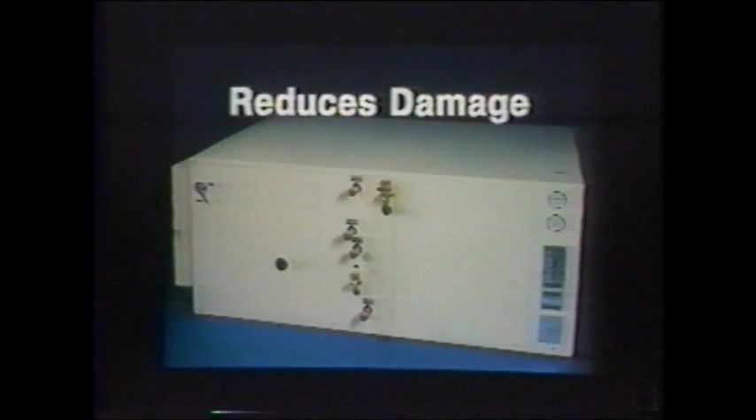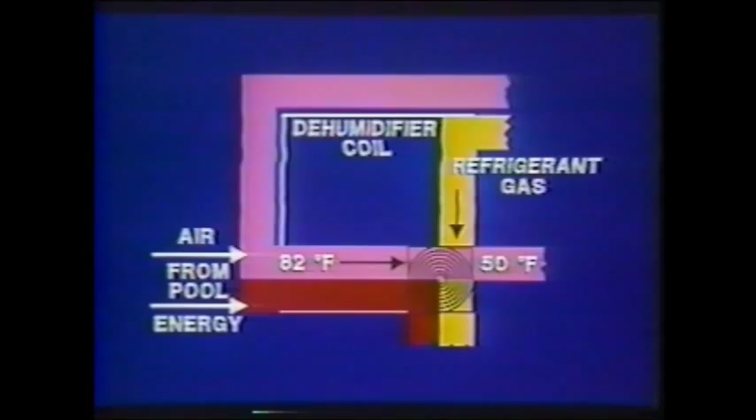Let's look for a moment at how the Dry-O-Tron works. Air from the pool enclosure is drawn through a dehumidifier coil, where it is cooled by a refrigerant gas to about 50 degrees Fahrenheit. When the air is cooled below its dew point, both water and heat are released. The heat energy is transferred to the refrigerant gas. Approximately 13.8 BTUs per pound of air is transferred. This breaks out to 8.5 BTUs of latent heat and 5.3 BTUs of sensible heat.

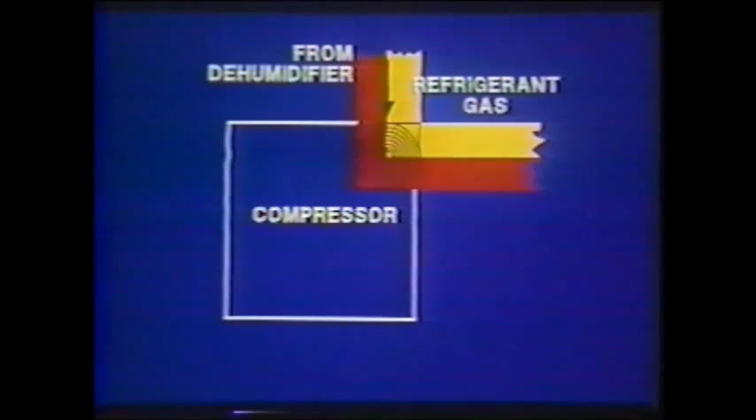As the refrigerant gas passes through a compressor, pressure is increased, and its temperature is raised by the electrical energy used to run the compressor to about 120 degrees. The refrigerant gas next passes through a pool heater where cool pool water, approximately 68 degrees, is drawn in and is heated to about 82 degrees by a portion, 8.5 BTUs, of the heat from the refrigerant gas.

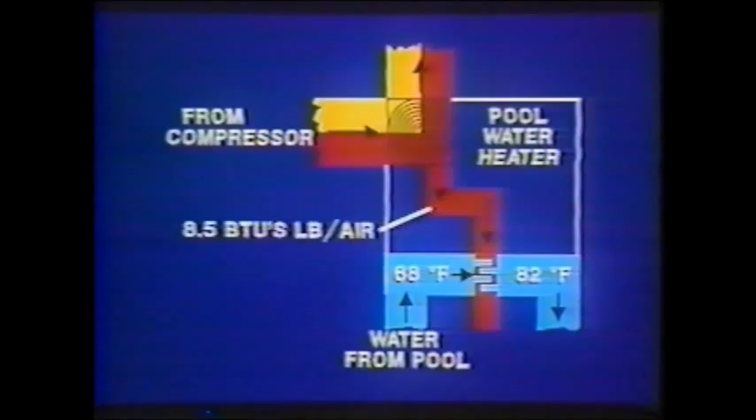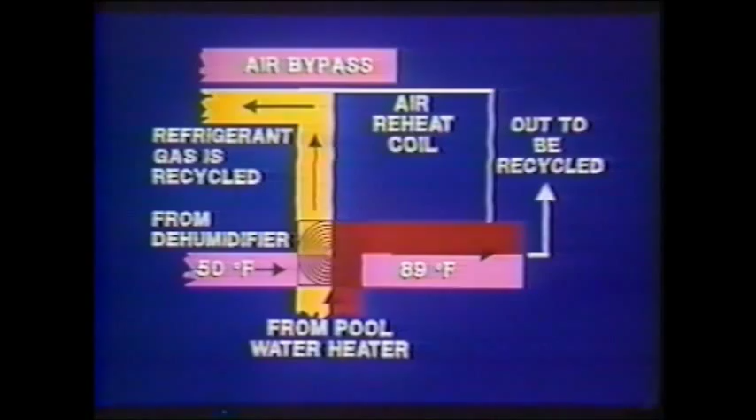The refrigerant gas, in a cooler state, and now partially condensed, moves to an air reheat coil, where it heats the dry cooled air from 50 degrees to approximately 89 degrees, and fully condenses back into a liquid. The dry heated air moves out into the pool enclosure, where it picks up humidity and energy. The humid air is then drawn back into the dehumidifier coil. It again meets the refrigerant that had been cooled in the air reheat coil and is now once again a gas, after passing through an expansion valve. The complete Dry-O-Tron loop system then starts again.

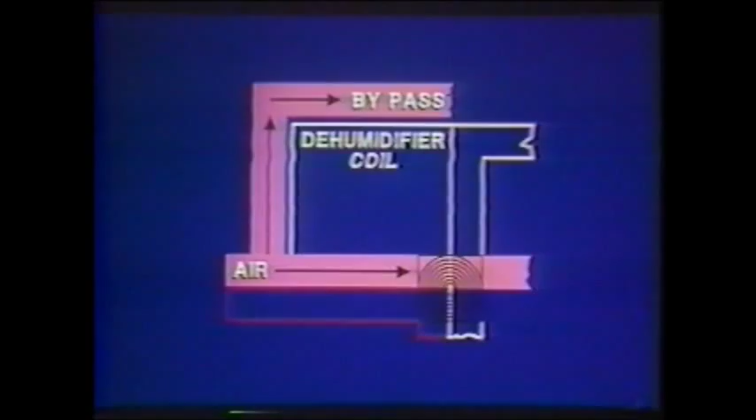Now that we've seen how air, water, refrigerant gas, and energy move through the Dry-O-Tron, we can see that the energy-saving dehumidifier is a precision instrument. As such, air and water must be allowed to circulate properly and in the right quantities. Half the air must go through the dehumidifier coil, half through the bypass. If too much air goes through the coil, not enough moisture is taken out. If too little air passes through the dehumidifier coil, suction pressure drops. The compressor has to work too hard, and the dehumidifier coil may freeze up.

The air going through the bypass is needed for the air reheat coil. If the air reheat coil doesn't get the right amount of air, it will have to reject its heat to the pool water instead, causing overheating. If the air reheat coil gets too much air, it will have to reject heat, and not enough will be left to heat the pool water.

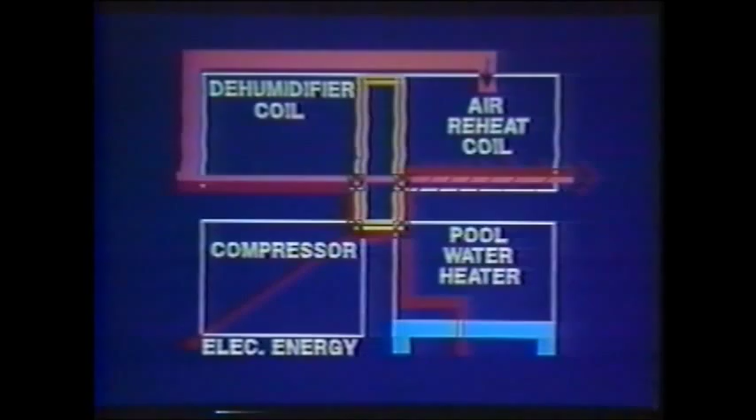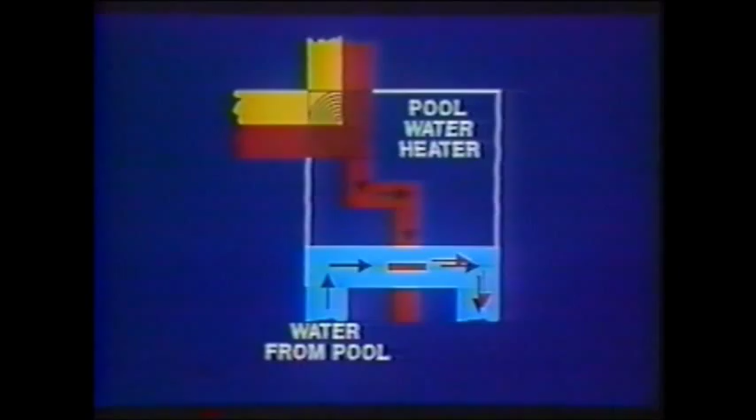Exactly the right amount of pool water must flow through the Dry-O-Tron. The pool water heater performs a balancing act because it doesn't really know how much heat the pool water needs, so it has to continually readjust its output by 2 water flow valves. As soon as enough heat has been supplied to the pool water, the heat is then used to reheat the air supplied to the enclosure.

When the Dry-O-Tron is first installed, unless it's summer, supplementary space heat will be needed. This is because the Dry-O-Tron borrows heat from the air around it to heat the pool water. To sum up, the Dry-O-Tron reduces humidity and structural damage. To do this, the installer must therefore provide a balanced supply of water and air to ensure proper operation.